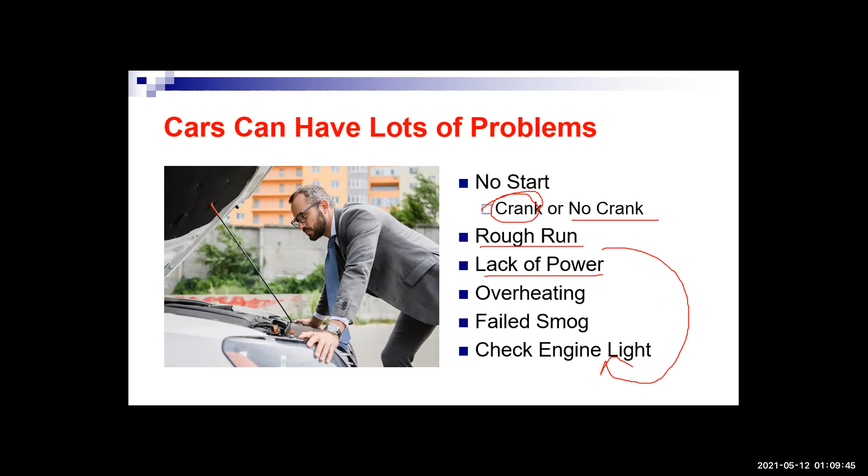You could have a car that runs rough or has a lack of power. Now that may or may not include a check engine light up on the dashboard. You could have a car that maybe overheats as we're heading into summertime here. We could have a car that, hey, this thing feels like it runs good, but I had to get a smog test done, and guess what? It failed smog. So there's all kinds of things when it relates to your car and getting that engine to run correctly that come into play here.

And it's a pretty vast area, and it's something that I've studied all of my adult life and then some, going on well over 20 years. So anyways, there's a lot of stuff to it.

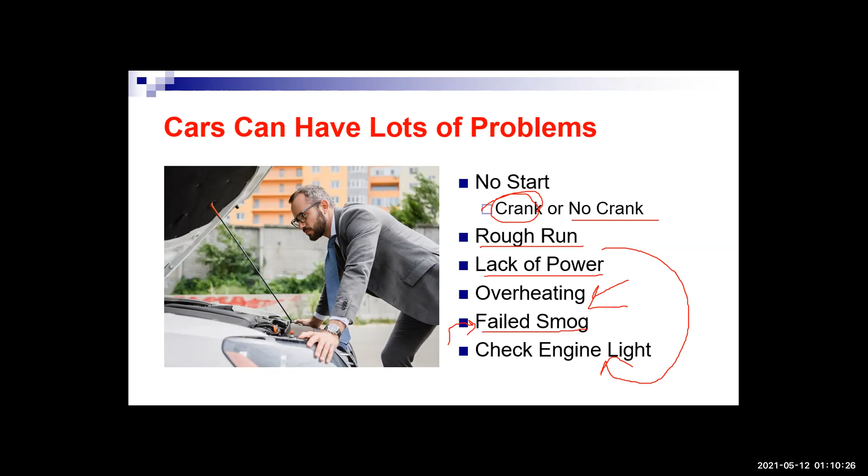As we talked about last week, the internal combustion engine on your car, the 4-stroke cycle and all that stuff in previous weeks, it's got to have spark, fuel, and compression, and everything has to happen in the proper order, the proper sequence, the proper timing in order to get this engine to run. So there's a lot of stuff going on there.

Now, I'm looking at, looks like we've had a few people join on the line, and that's awesome. I see Lonnie jumped in with us. It's good to have you here, Lonnie. And again, we have Rebecca and Tim and Jacob, Tyler. It's really good to have you guys here.

So we're going over some diagnostics. And again, we're basically merging our electrical and engine diagnostic presentations together to get you the most out of this thing.

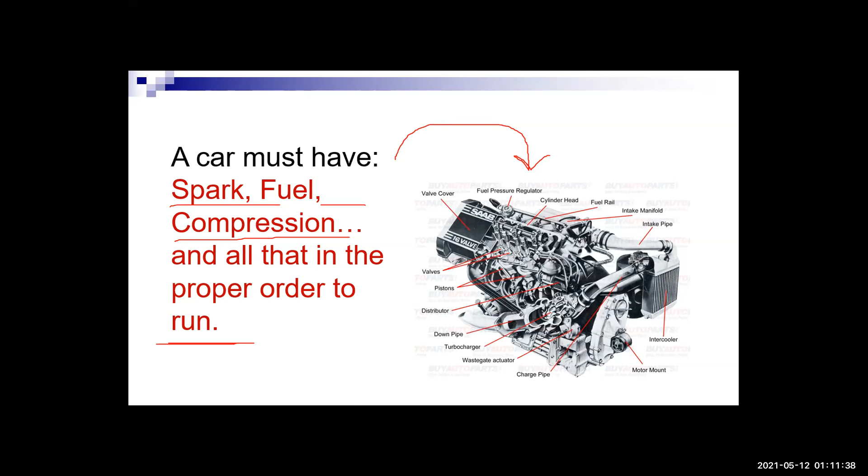So one of the things that I mentioned last week that's super important is to not forget to check the battery. And it might seem kind of silly almost in a way, but it's really, really important. In fact, what will happen is you'll think the battery's just fine, and maybe it's not, maybe it's just getting a little weak. If the battery voltage drops below 10 volts, and actually I've found it, if it drops below 10.5 volts, the computer may not be able to function properly and do its job.

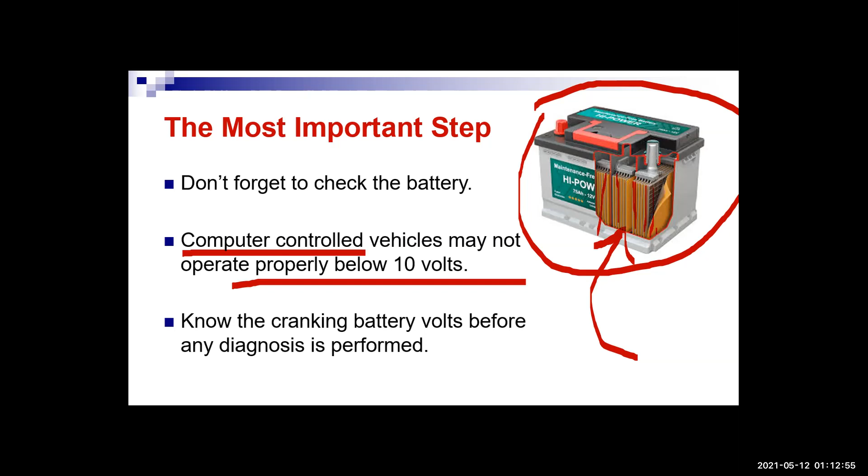So here's a picture of a car battery, and it's cut away so you can see on the inside there. And inside a car battery, guys, you have a mixture. There's liquid in here, and that liquid is a mixture of sulfuric acid and water. And then inside you can see that there's all these plates here, all these kind of paper separator looking things. Those are plates, and the paper separators separate out the positive plates from the negative plates. And then those plates are put together in groups, and they ultimately get connected to the positive post and the negative post of the battery.

So this battery, guys, you actually have a chemical reaction that occurs inside here, and it uses that to make electrical voltage. Well, these batteries typically have a lifespan.

So if I get my text tool up here, yeah, let's see if I can do that. Let's see, text tool. All right, if I get my text tool going, what I'm going to say is the lifespan is usually, let me do this, 3 to maybe 6 years car battery life. And if I just want to make sure you guys can see that. Oh, you can't. Hang on a second here.

Now let's make sure that you guys can see that. I don't know if you can see it or not, but 3 to 6 years, that's the life of our car battery, with most batteries lasting about 4 or 5 years.

So 4 years, 5 years. One of the things I look at when I have a car that maybe doesn't start is how old is this battery? If it's 4 or 5 years old, it's kind of suspect. Know the battery volts before any diagnosis is performed. You could have a car that doesn't start. I've even had a car fail smog because of a defective battery that was constantly draining the electrical system down.

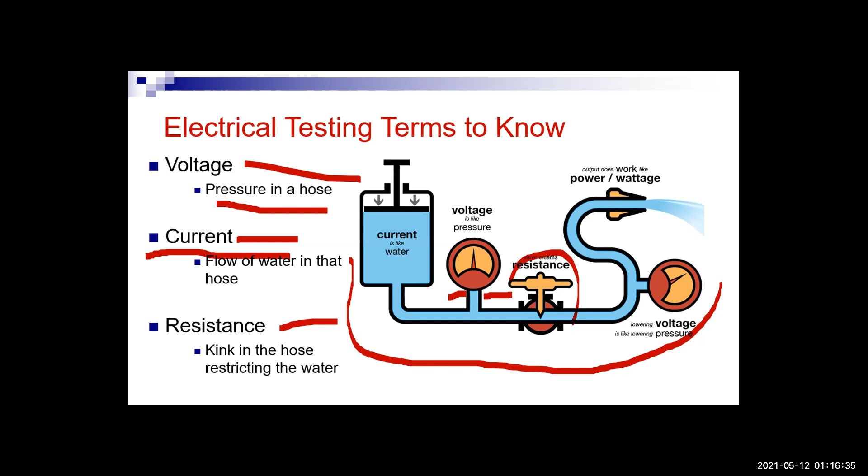So anyways, voltage is like your electrical pressure, it's your pressure in your water hose if you will. So if I have a water tower here, that voltage is my water pressure, okay, it's electrical pressure though. Current is like water flowing through the hose, and resistance would be a kink in that hose that would restrict the flow. So again, what are these terms really?

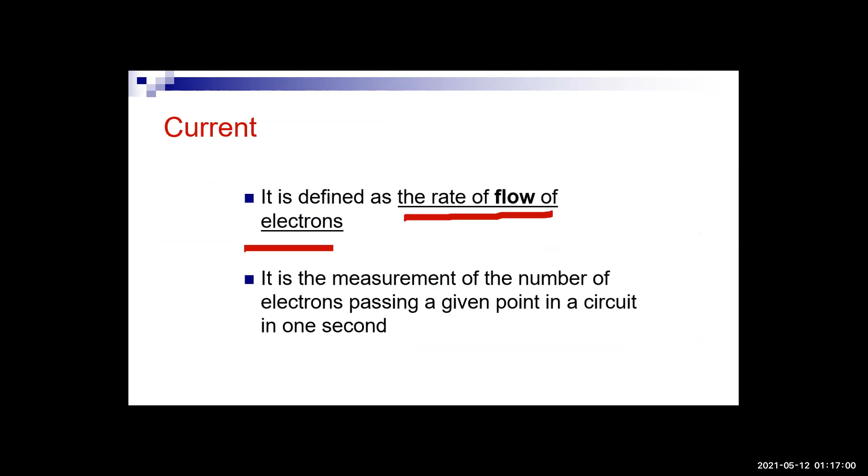Voltage is electrical pressure that causes the electrons to move in an electrical circuit. Current is the flow of the electrons through the wires, through our components, whether that's an electric motor or a light bulb. And then resistance is any opposition to that flow. So if there's any opposition to the current flowing through the hose, that's going to be resistance. I don't care what electrical circuit you have, any circuit that's operating is going to have some voltage, some current, some resistance, all playing out in that circuit.

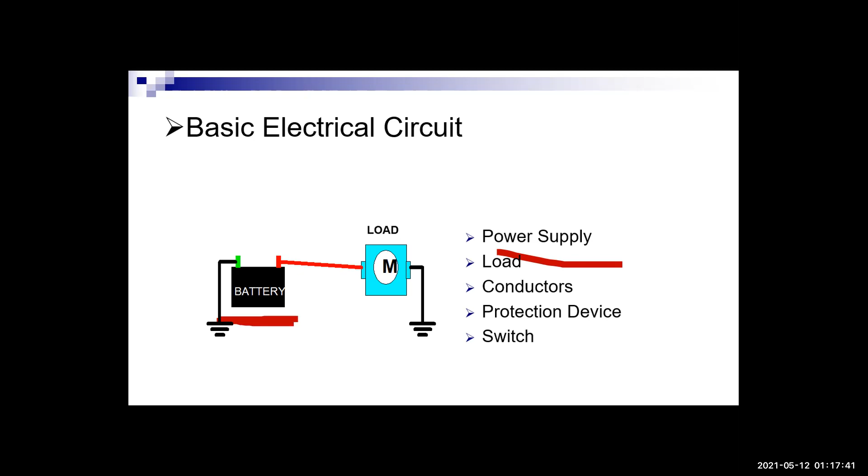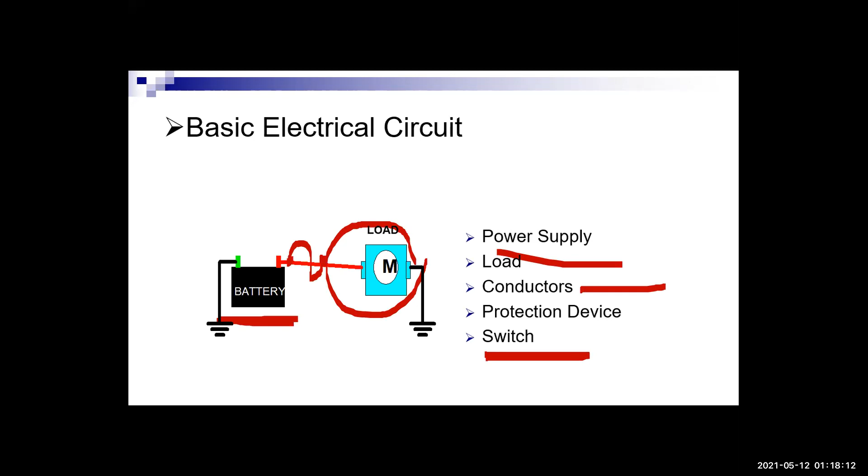Now, what are some of the things in a basic electrical circuit? Well, you're going to have a power supply, for us in our car that's our 12-volt automotive battery. You're going to have a load, that could be your starter motor, it could be a headlight, it could be the car's computer system or an electric fuel pump. Protection device - there's usually some type of fuse in that circuit to protect the wiring. I'm trying to draw in a fuse right there. Conductors, those are the wires themselves. And I usually have to have some type of control, some type of switch to function that circuit. So there's going to be some basic parts to build an electrical circuit that you need to have happen.

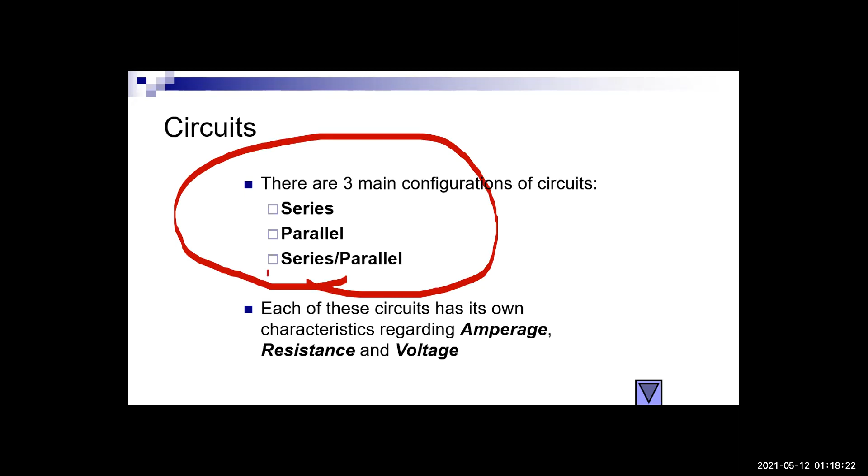On top of that, there's different ways that you can wire up these circuits. You can wire up in series, or you can wire up in parallel, or you can have a combination of the two. In the electrical class, we spend a lot of time diving into the different circuits and testing them. But to show you, I'm going to show you a picture of how it would look more on a regular car. Now keep in mind that each type of circuit has its own characteristics regarding how the amperage flows through the circuit, what's going on with the resistance, and how voltage drops happen throughout that circuit.

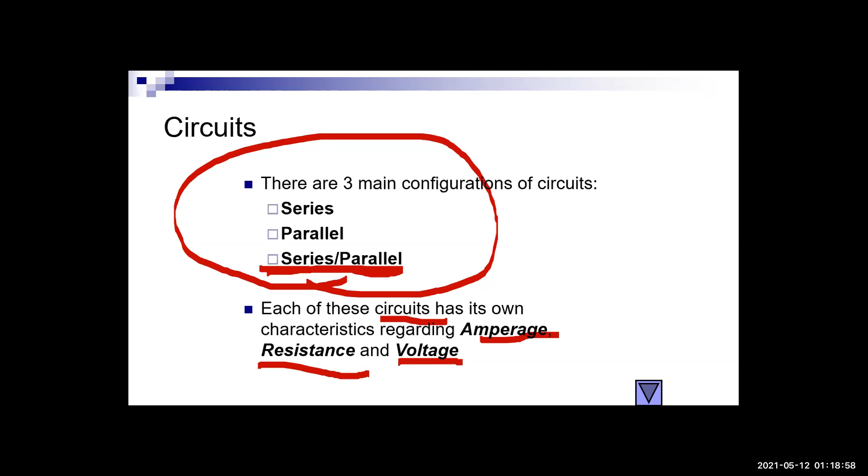The conductors or wires, good materials for conductors are things like copper, aluminum, steel. Well, the frame of our car is made out of steel, so that becomes a pretty good conductor. So instead of having to run wires all the way out to our component here and all the way back, what we can do is tap into that ground or that vehicle frame and use that as the negative connection back to the battery. That's how we do that.

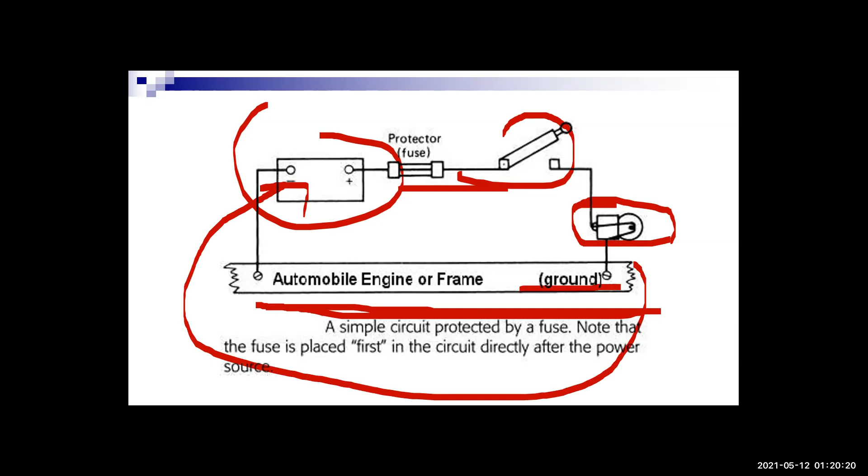So where it might look something like that on the car, on a wiring diagram, what would be done is it would be drawn like this, where this weird looking symbol with all these lines is the battery.

We saw kind of a cutaway of a battery. That was a series of plates, right? Positive plates and negative plates. Now, if you've ever lifted a battery, you know they're pretty heavy. That's because what's on those plates is lead. It's sponge lead on the negative plates and lead peroxide on the positive plates.

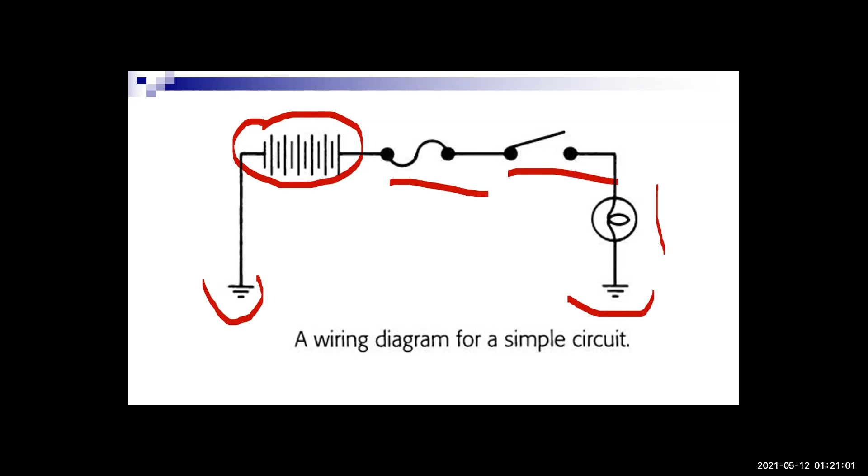So there's our battery, here's our fuse, there's our switch, and there's our light. And this is the schematic symbol for ground. So that's a good example of a series circuit, meaning that there's one path for current to flow. The problem with this series circuit is if anything opens up, then the whole circuit goes out.

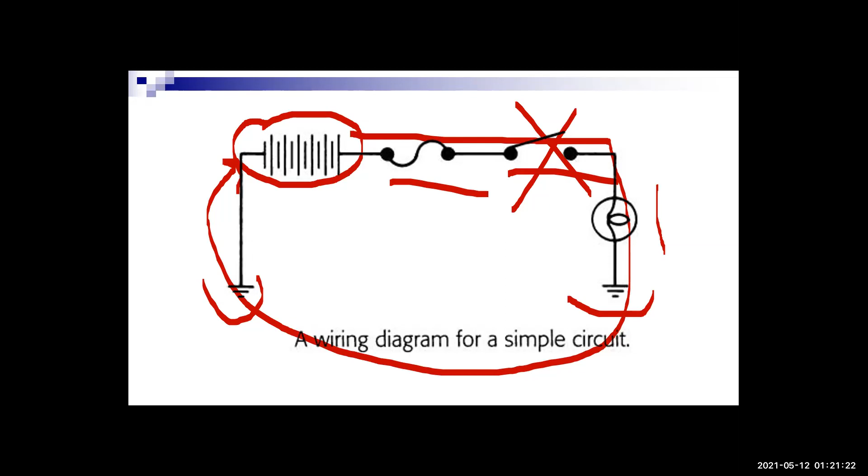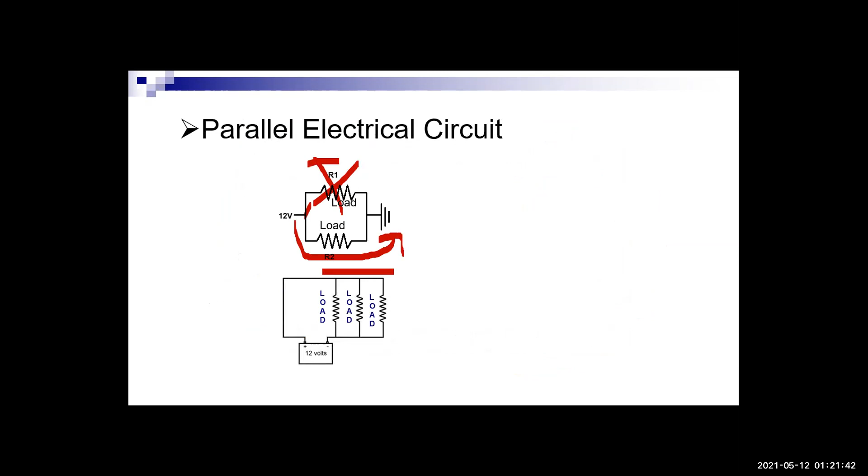Most of the circuits on your car are going to be a parallel circuit, or maybe a series parallel circuit, a combination of those two. So if this is a parallel circuit, instead of these being resistors, if these are two headlights, if one headlight burns out, guess what? The other headlight's going to keep going. And that's why we tend to run our automotive circuits in parallel, so that they have more than one path for current to flow.

And each device then receives its full source voltage, and each device has its own path to ground. Now, I need to put some terms up here. We talked about voltage, current, and resistance. I need to talk about what do we measure this stuff in. For instance, voltage, that's an easy one, it's measured in volts. Current, though, current is measured in amperes or amps.

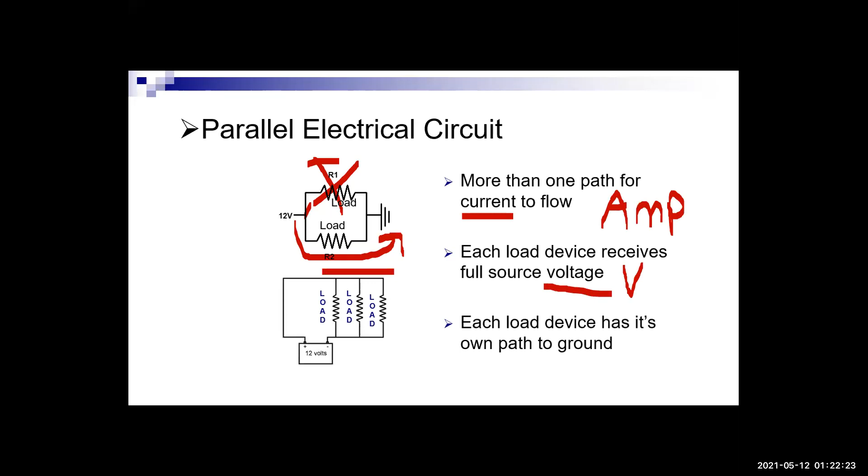So now what we're going to do is shift over and look at how this would look on our meter, and how we could do some tests with a basic multimeter. You could have any one. This is like a $40, $50 meter that you get from the local auto parts store. And in one of our classes, we feature this Snap-on meter that's like a $400 meter. So we went from a $40 meter to a $400 meter.

Here's a meter that you can get for just about $10 that will do a lot of electrical tests. And to get started, this is probably really the only thing you need. It can do a lot of the basics that we're going to be talking about tonight. So let's look at these meters.

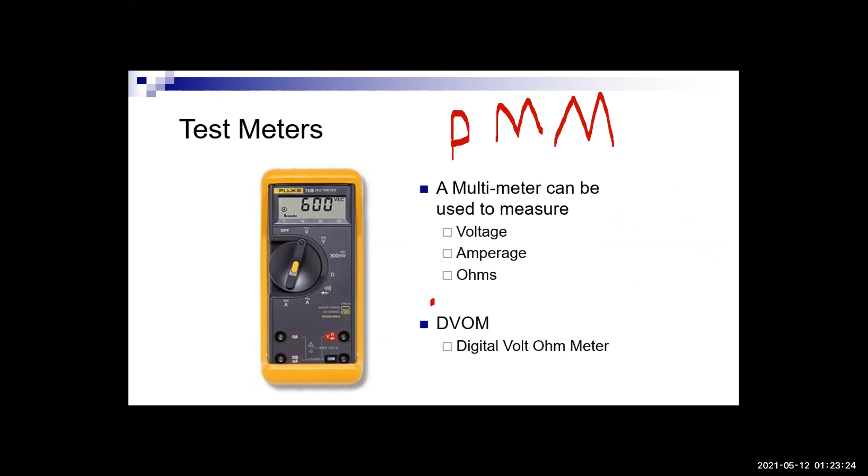We tend to call them a multimeter, or DMM, for digital multimeter. Sometimes if you're old school, you might call it a DVOM, for digital volt ohm meter. But because most all these meters, even this cheap one I have here, can measure amps, it's really more of a multimeter. So it can measure voltage, that's electrical pressure measured in volts. It can measure the current flow, which is measured in amps, or it can measure resistance, that's measured in ohms.

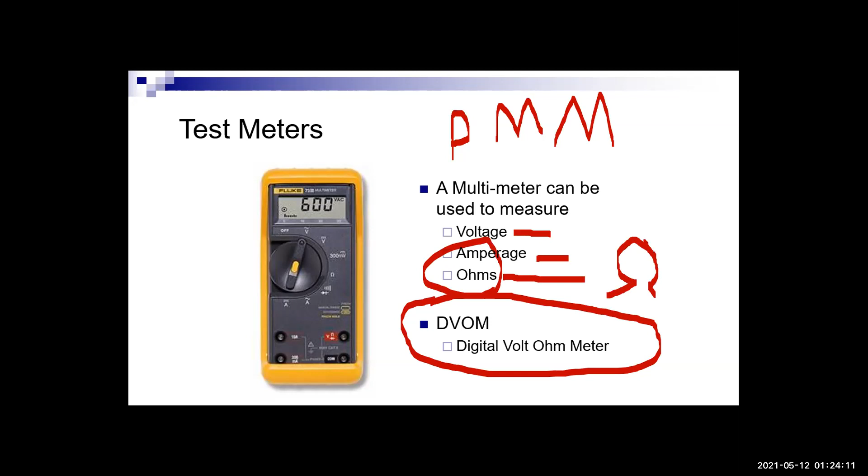Again, voltage, current, and resistance, those three properties. Voltage is measured in volts, current flow is measured in amps, and resistance is measured in ohms. On your meter you'll see a little Greek omega symbol that I'm trying to draw out right here. So what do those look like on your meter? What would you select on that dial right there?

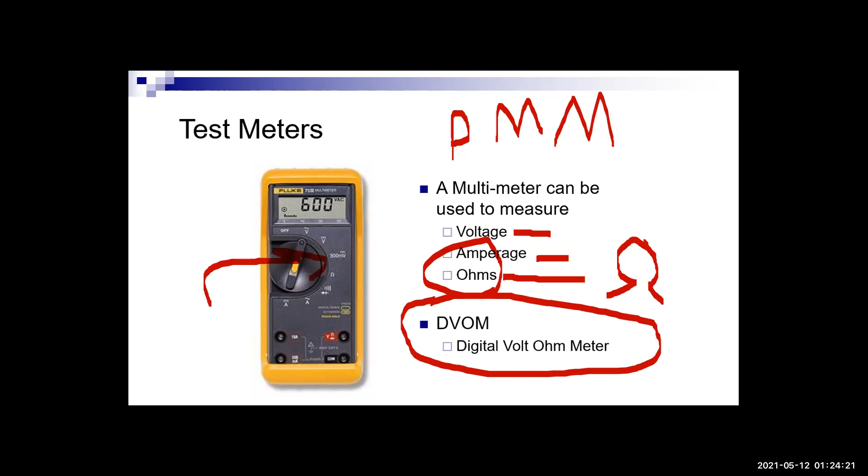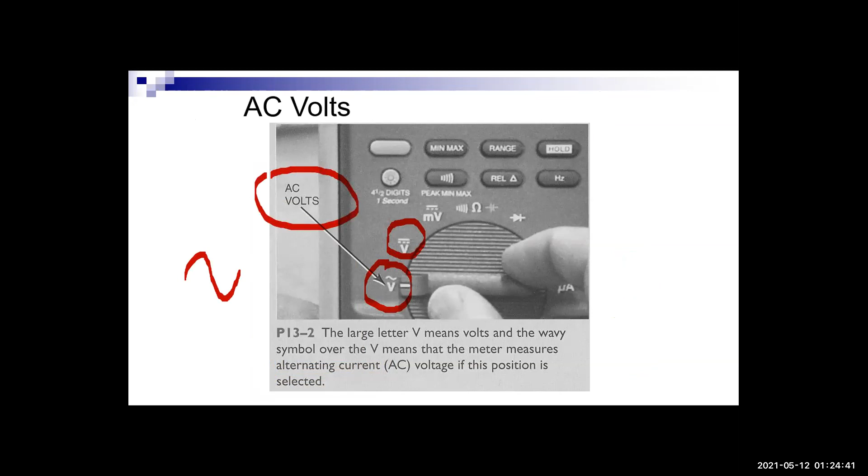Notice that there's a V right here on this meter face, and there's a V right there. Well, this V with the wavy line is for AC volts. And AC volts is typically what you'd have in your house.

Okay, it's alternating current. It switches back and forth, and if you put an oscilloscope on there, it would look like that. We don't use that feature too often when we're testing cars, but if you were testing electricity at your house, that's what you'd be on.

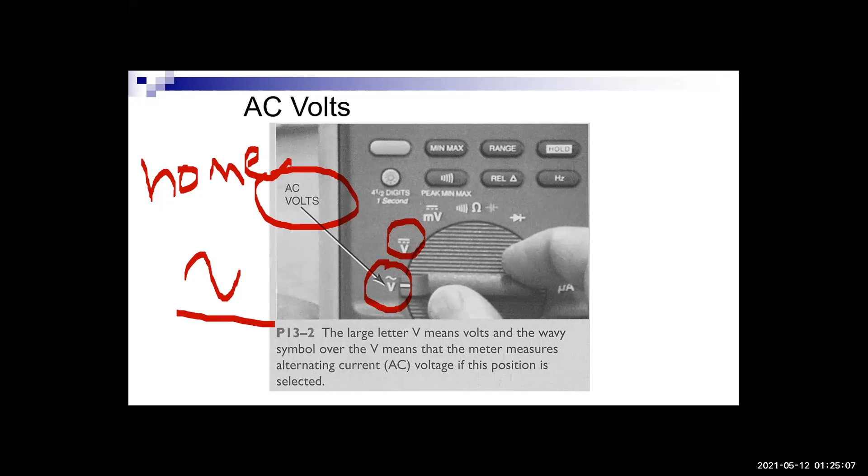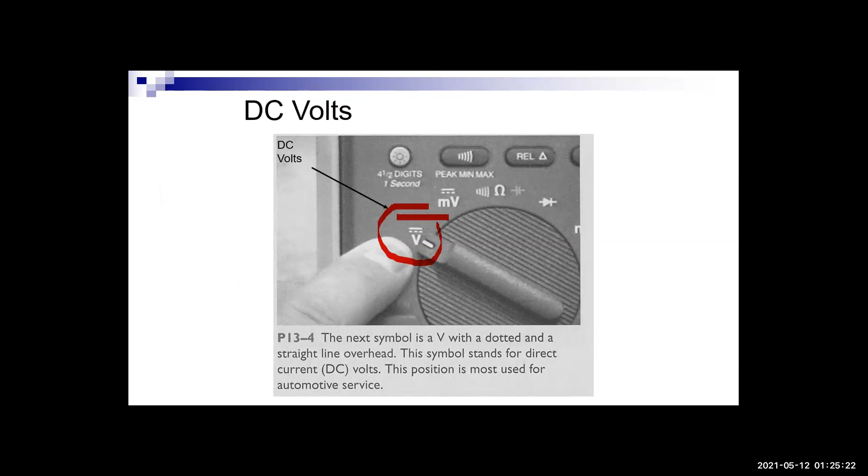Your car, because it uses a battery, measures volts DC, so they draw it with this straight line with a little dashed line underneath it, meaning the current, the amps, is going to flow from positive to negative. It's flowing in one direction. There's a couple different thoughts, whether it's conventional current flow or electron flow theory, but for our class, we're going to say it flows from positive to negative in one direction, and that's DC, or direct current. If you're measuring volts on your car, that's the most common measurement you're going to do.

So if I back up a couple of slides here, you can see it saves a lot of my scribbles here.

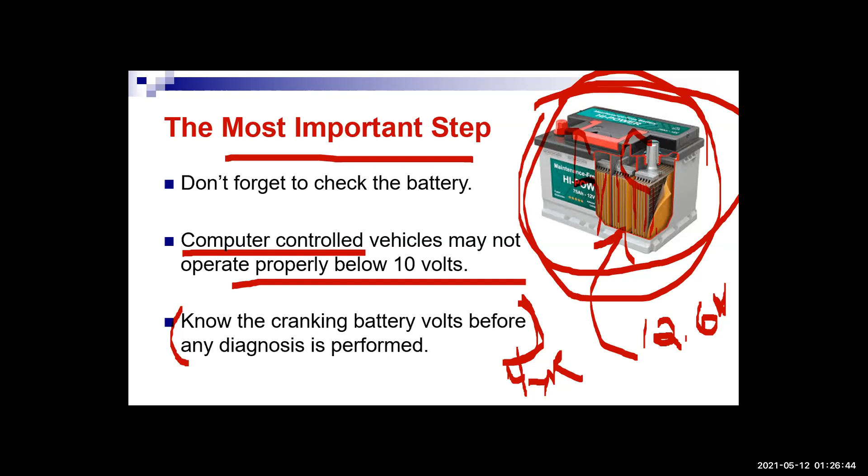When we talked about checking the battery, I would want to hook up to that battery, and I really want this battery to read not just 12, but 12.6 volts, because that's what a fully charged lead acid car battery should have. Believe it or not, if you walked up to that battery and tested it with your voltmeter set to volts DC, and it only measured 12 volts, that battery is really only at a 50% state of charge. So you really wanted to see 12.6 volts.

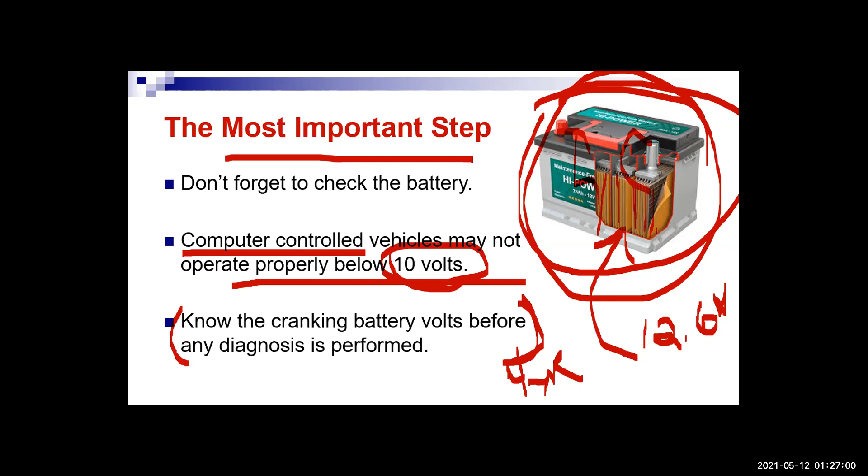And if you kept your meter hooked up as you were cranking over the engine, I would want the voltage to stay above 10 volts. Really, I like it to stay above 10.5 volts while I'm cranking over the engine.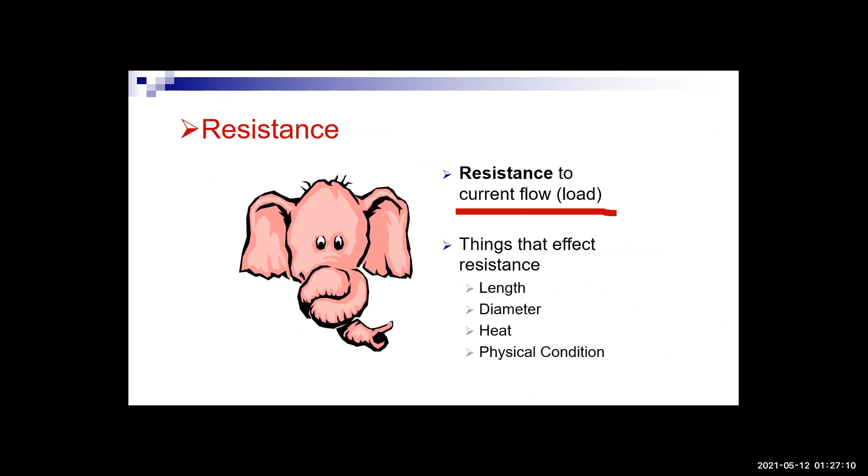So voltage, current, resistance. Remember, resistance is the one measured in ohms, and current flow is measured in amps. We talked about the circuits. We'll fast forward back to where we were.

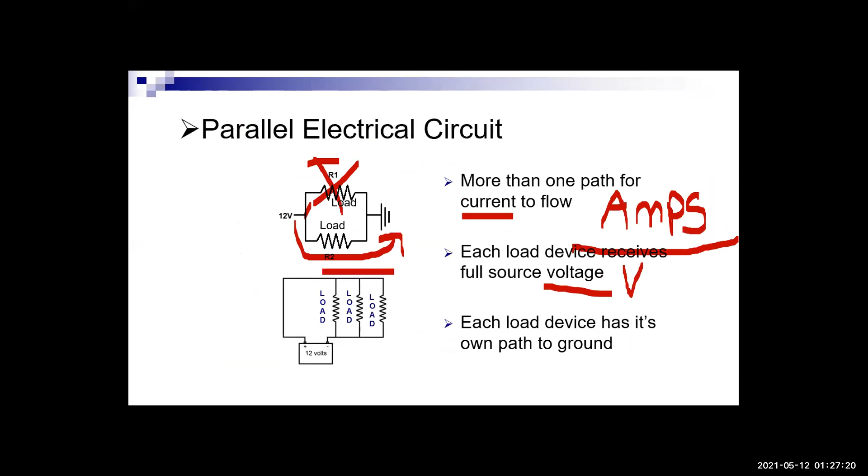So we want volts DC for testing our car, and it's the most common measurement we're going to do. Here's an example: if I had that basic series circuit with the light, before the light bulb, my voltmeter should read 12 volts. After the light bulb, if I hooked up my red lead or positive lead to the wiring going to the light, and the other lead to the chassis or to ground, it should read 0 volts at that point, or really close to it.

So again, voltage, what is it? It's like your electrical pressure, if you will. So it tells me, hey, before the light, I have pressure, and then I drop that pressure when I go through my load, when I go through that light. And that's really how it's supposed to work. I should have voltage before my component, and then after it should be relatively close to 0.

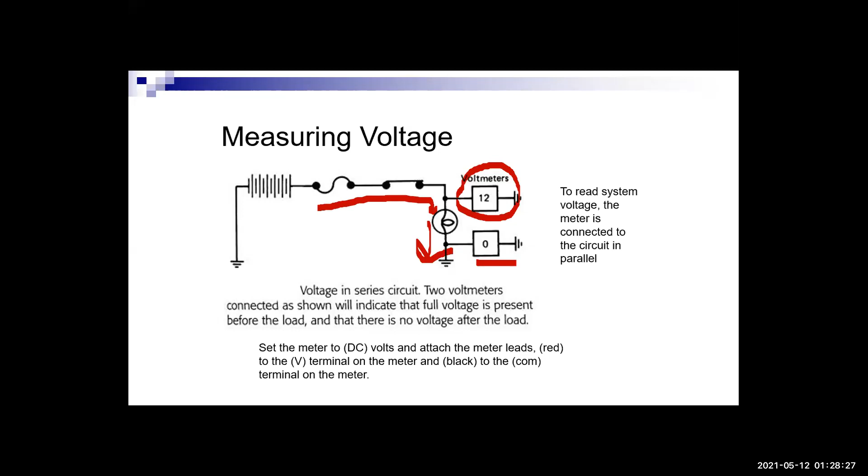So the higher the voltage, the more current flow you could have, right? Like if instead of a 12 volt battery, I had a 300 volt battery, well, I could flow more current, right? So that's why an electric vehicle doesn't just rely on a 12 volt battery. I mean, it still has a 12 volt battery to run the computer and stuff, but the actual traction battery that propels the car is going to have 300 volts or so, or more, to give you the pressure you need to drive that car down the road.

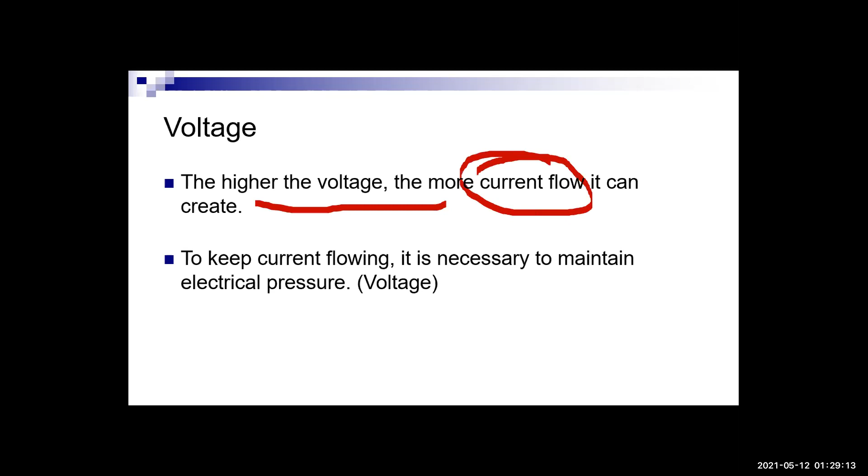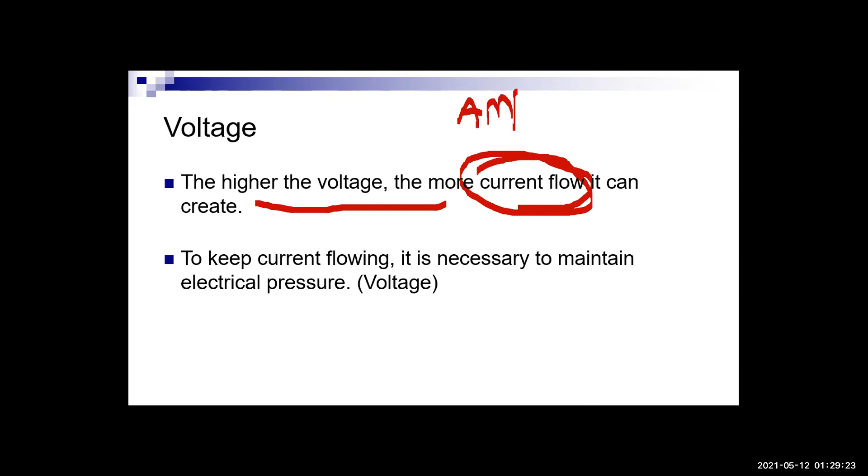Now it says the higher the voltage, the more current flow it can create. Here's the thing, it's really all about the current flow. It's the flow of the electrons, the flow of the current, which we measure in amps. That's what actually does the work. But if I don't have any voltage, if I don't have any pressure, I'm not going to get any flow, right? I'm not going to get any amps. So it's kind of a unique relationship there. I need the voltage to get the amps. It's really the amps flowing through something that makes it work. So I always think of the amps, the flow of electrons, through a little light bulb filament.

That's what makes that light bulb glow and produce light for you. Now, anytime you're flowing electricity through anything, whether it's a wire, a light bulb, an electric motor, or a fuel injector, remember that component is going to have some resistance. There's always some opposition to the flow.

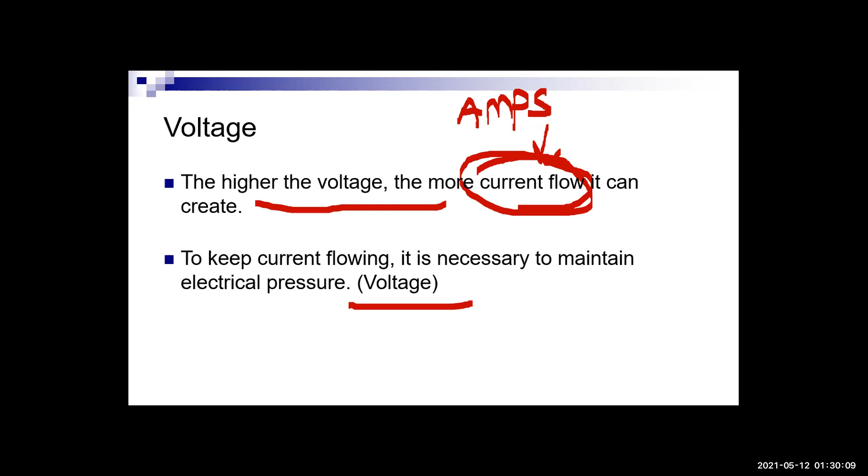How do we test for resistance using our meter? We go to that little Greek omega symbol. Every meter will have some type of resistance symbol. So if I put this one up on the screen right here, you can see that if I put my lead over there, I'm over in my resistance zone there.

So when I do that, I have to have my circuit turned off and my power supply disconnected, because when I'm testing for resistance, I'm sending power out one lead of my meter and I'm getting it back on the other lead. So if I touch these two leads together, this is where I can measure the resistance of my multimeter leads.

And this one says zero, which is pretty good. I'll go down to the finest scale. Let's see what it says. So 0.03, 0.05, something like that. All right.

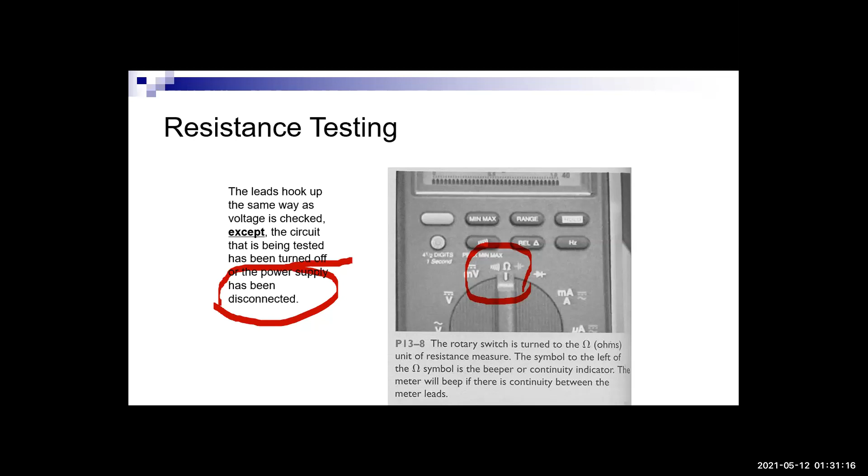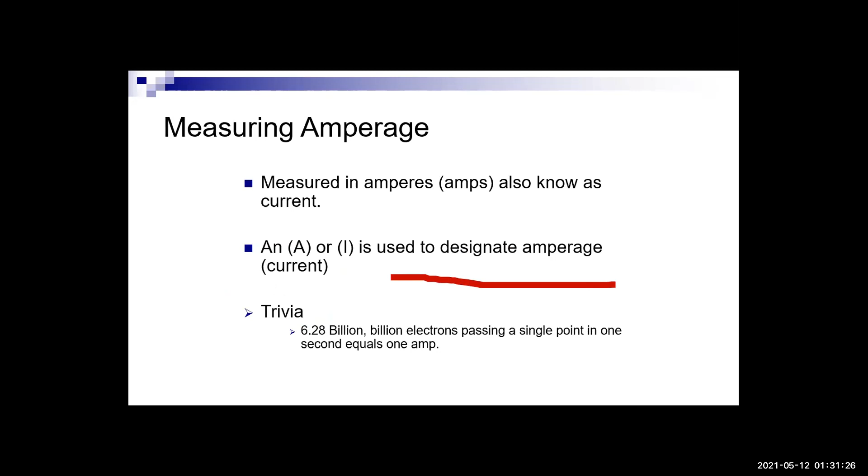Now remember, amperage is the flow of electrons. That's what it's really all about. That's what does the work in a circuit. And we would measure that going over here to these amps sections of our meter.

And it's pretty tricky. We not only have to go over to the amps section, but you've got to take the lead out and move it over to another spot on the meter to measure amps. So amps is probably one of the more difficult measurements to do. Your circuits and your meter are more vulnerable when you're measuring amps.

Fortunately for us, the most common thing you do really is measure volts. So I usually stick to that for my default, keeping the leads there. You notice that there's different ports that the leads go in. The black lead always stays in the COM port. So I'm going to take the leads out of one meter and put it in the other.

So the black lead goes in the COM port and he pretty much stays there. But the red lead, he can move depending upon what I want to do. Most of the time, 95% of the time, I'm measuring volts or ohms, and so he's going to go over here. Every once in a while, I want to measure amps and I have to move him to one of these other spots.

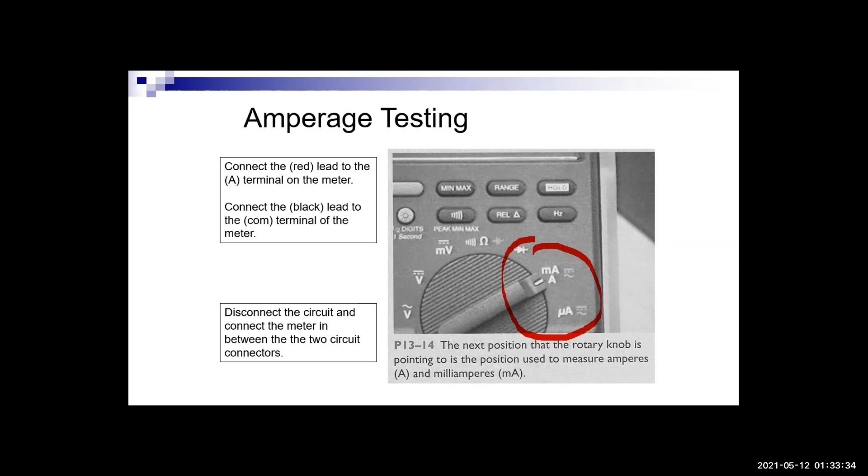So remember we were talking about diagnostics, and we kind of took this sidestep for electrical because one of the first slides says, hey, make sure you've got a good battery in the car. That battery should measure 12.6 volts. So it's a good thing to do: test the battery voltage. It should read 12.6 volts, and that's 100% state of charge, or SOC.

Now, if you have a car that's running weird, or it doesn't start, or it's got a check engine light on — this semester I've been teaching a scantool class, and I've been talking to those students a lot about building a diagnostic process, a step-by-step process to go through to help you figure out problems. A lot of times people think, hey, I'll talk to the computer on the car.

Well, what the scantool is could be a little interface like this one right here, could be an actual multi-thousand dollar tool, but it basically allows you to talk to the computer on the car. It's a tool that allows you to scan or talk to the computers on the car.

Well, guess what? That scan tool doesn't replace your multimeter. It doesn't replace a lab scope for that matter, or any other dozens of different diagnostic tools like a compression tester or anything else. But it does allow you to talk to the computers, and from that, you can do a lot of diagnostics. Why? Because built into our cars these days, over the last 20, 30 years, as we put computers and stuff on our cars, we've also put on them an onboard diagnostic system.

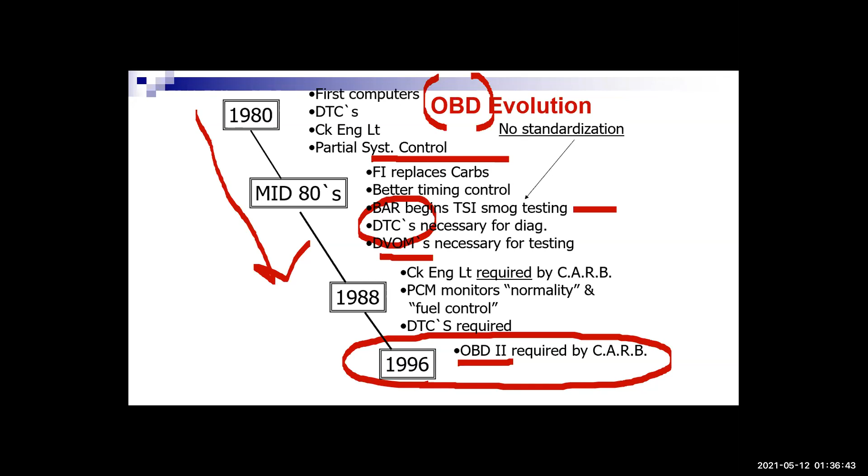Now, one other note on talking to the computer. When I talk to the computer with my scanner, whether it's a little interface or like this nice Snap-on scanner right here, we call that backdoor information. Why? Because it's processed information from the computer. And that means that sometimes the computer misreads stuff. It's like you're seeing whatever the computer thinks it's seeing, and then it decides to tell you about it.

It's like getting a story from a friend of a friend—over time, the story changes. Because we've used our scan tool to talk to the computer or powertrain control module, and it got its information from the input sensors, stuff can change in there. So I always look at scan tool data with a little bit of skepticism, because sometimes it can throw you astray. But if you understand how to leverage it, it can really be useful.

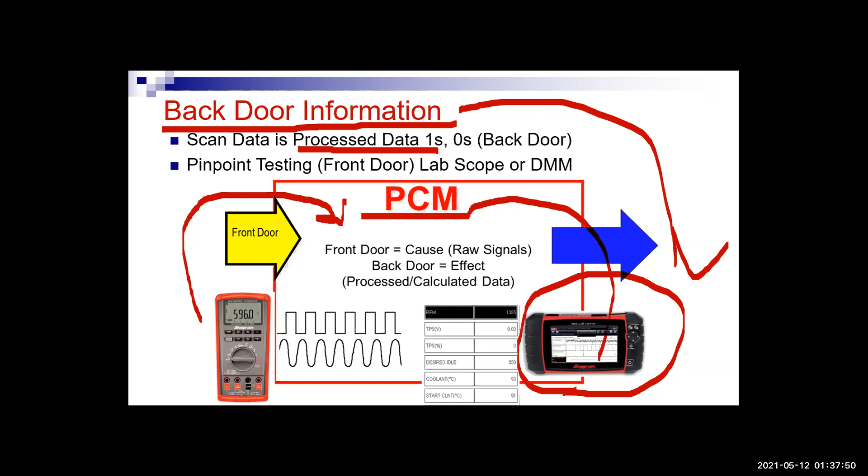Now, that being said, there's all kinds of different levels of scan tools. Like I was talking about, this cheap interface—here's a whole bunch of these inexpensive interfaces. I really like this one right here, the Vgate iCar one. It has pretty good connectivity to both Android phones and iPhones.

But there's a reason why the folks at the dealer have scan tools that cost $8,000. They can do a lot more features and really tap into those computers. Those scan tools will be manufacturer specific. They're going to have all kinds of things that they can do, but they also cost several hundred, if not thousands, of dollars each year just to keep the scan tool working.

With these little generic scan tools, we're basically going to be focused on things that ultimately affect the emissions of the vehicle. So you can't get all the information—you may not be able to get things like wheel speed sensors and your airbags, but you should be able to get the stuff that relates to your engine and would cause a check engine light or cause it to fail smog or run weird.

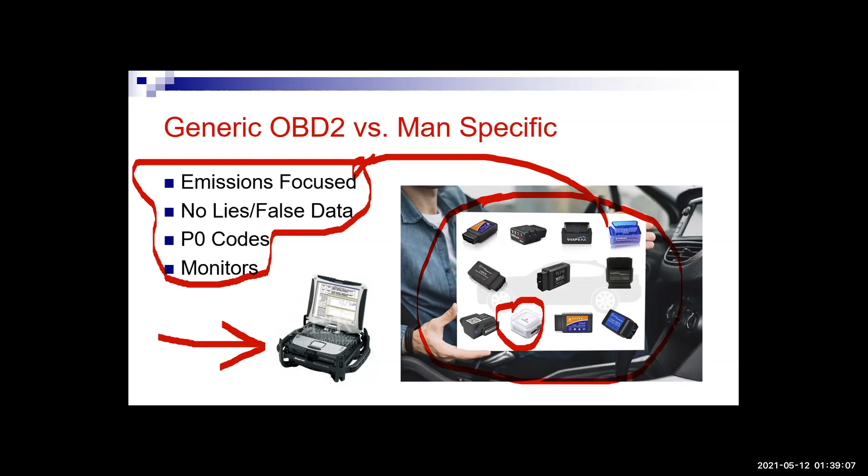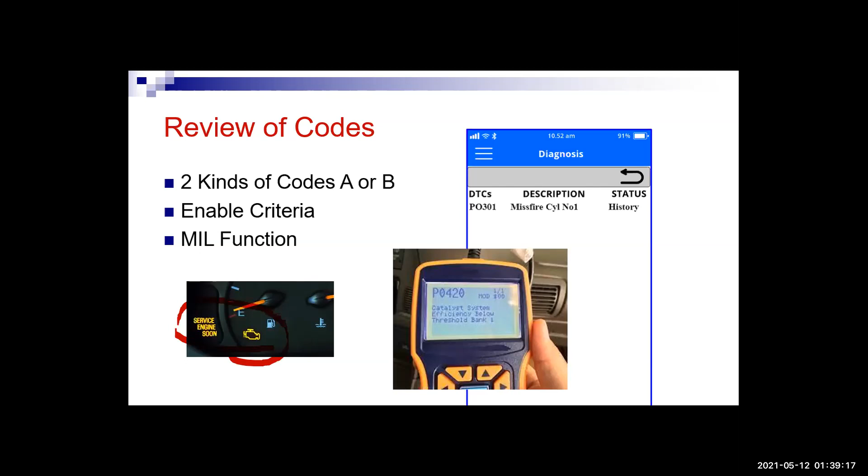So if you have a car that's running poorly, or it doesn't start, or it has the check engine light on—and that light's going to look something like this, might have a picture of the engine, it might say service engine soon, or it might say both—we call this the malfunction indicator lamp. So if that light is on, guess what? That computer has set some codes.

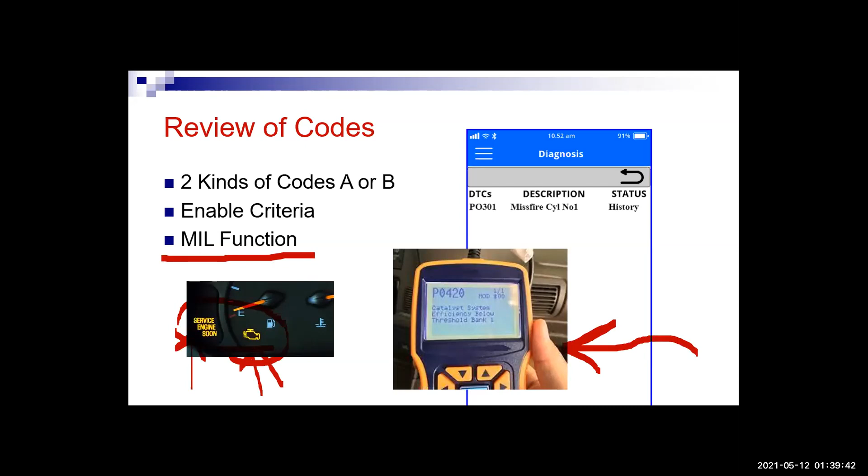One of the things that would be smart for you to do is go in there and talk to the computer with your scanner. So here's a handheld scanner, similar to what you could probably buy at your local auto parts store, and it's pulling a code. You want to pull that code, whatever it is, and figure out what's going on there.

Just because it sets a code doesn't mean that's definitely what's wrong with the car. Here's a good example: I have a P0301 misfire code on cylinder 1. Does it tell me why it's misfiring? No. It could be a defective spark plug, it could be an engine with low compression on cylinder 1, it could be dozens of different things, like a clogged fuel injector. It doesn't tell me exactly what the problem is. It tells me that it set a code, meaning the computer looked at it and something isn't right related to this. It's up to us, with our multimeters and our automotive smarts, to figure out why that code is being set.

When I see the check engine light on—this malfunction indicator lamp or service engine soon, whatever you want to call it—I think, okay, the computer's upset about something. I'm going to get my scanner and see what it's upset about. That's what I'm doing when I pull the code.

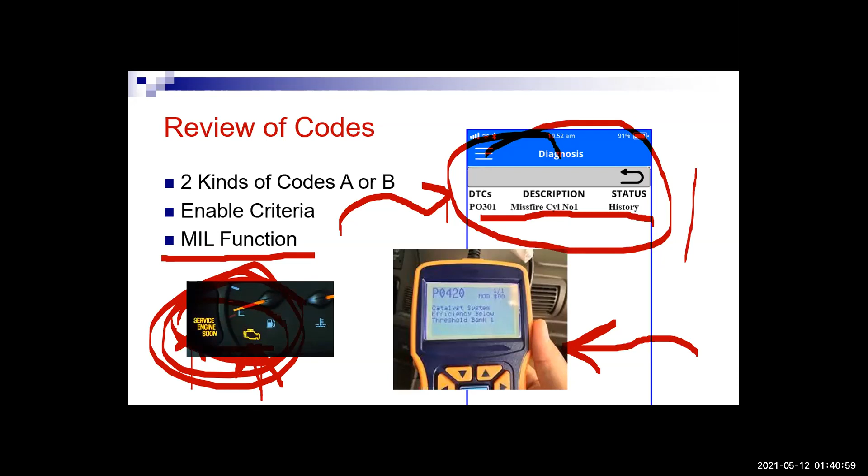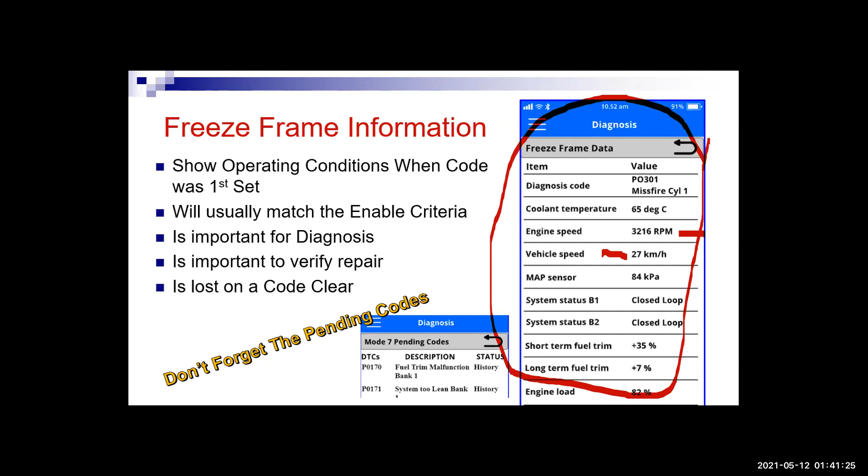One of the things cars from 1996 and newer, our OBD2 cars, have is what they call a freeze frame. It can tell you what happened, how the car was being driven when the code was set, and that's a really strong thing to check. So this car was going 27 kilometers an hour at 3,000 RPM. If I scrolled down, I could see how fast it was going down the road, all that type of stuff. Not only does it set codes, sometimes there are codes that aren't full-fledged codes—we call those pending codes—and you can check those as well.

There's all kinds of data you can get from the computer. This data might look complicated, and that's because it is—we have whole classes, semesters long, that teach you about all the data PIDs, what they mean, and how to read them. But these are all different parameters, and most of them relate to sensors on the engine. So this one right here says engine RPM—that's going to largely come off your crankshaft position sensor, or CKP sensor. In fact, we talk about prioritizing these data PIDs and just selecting the most important stuff. The scanner can definitely give you a direction to go.

In my scanner class, we've spent quite a bit of time with these little cell phone based interfaces, and the ones we use work with the ELM 327 protocol. That's what we have in the AT100 class as well—we talk about the ELM 327 communication protocol between the scanner and your cell phone. It basically uses your cell phone, and you can get different apps. The one we've been using is called Car Scanner Pro, available for both Android phones like mine or iPhones, and it works pretty good. This is what it looks like.

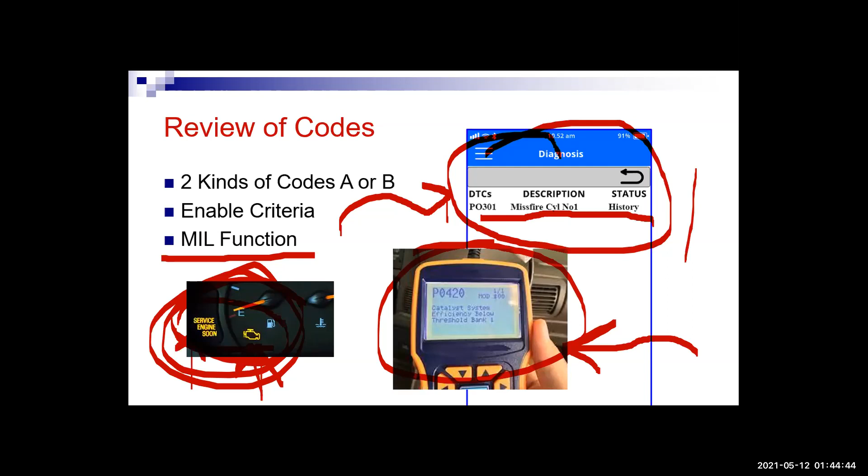If your check engine light's on, you're going to figure out why the computer—not necessarily what's wrong with the car, but what the computer is upset about. Whether it's a misfire on cylinder one, whether it's fuel trim issues, whether it's a catalytic converter. So anyways, the scanner is one more tool in your diagnostic toolbox to help you figure out what direction to go.

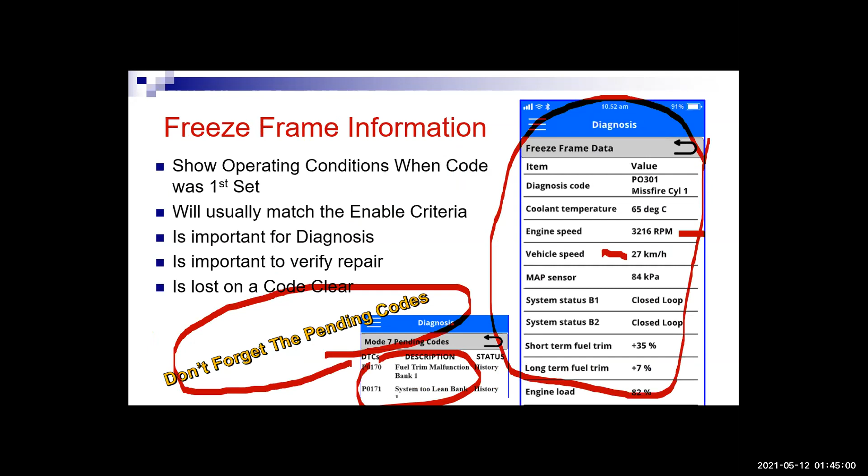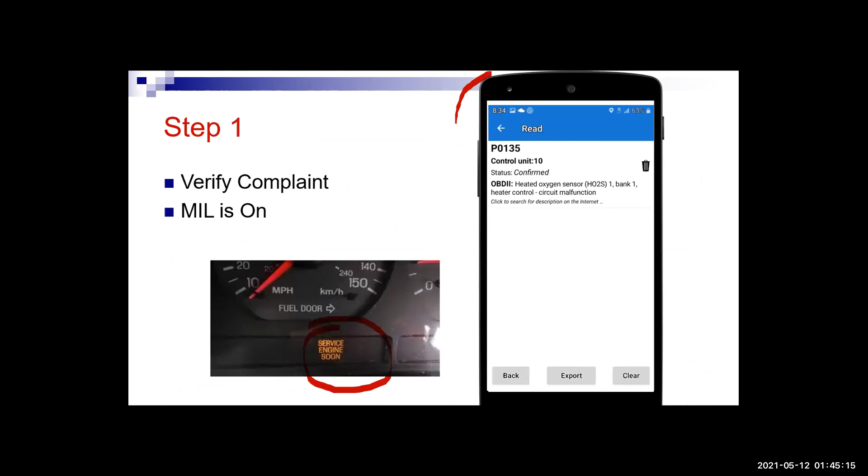There's a lot of stuff with that. So if I had any drivability problem and this light was on, one of the tools I would grab right away - I would still check to make sure I had a fully charged battery and all that stuff, but I'd grab one of these scanners and check to see if I had any codes.

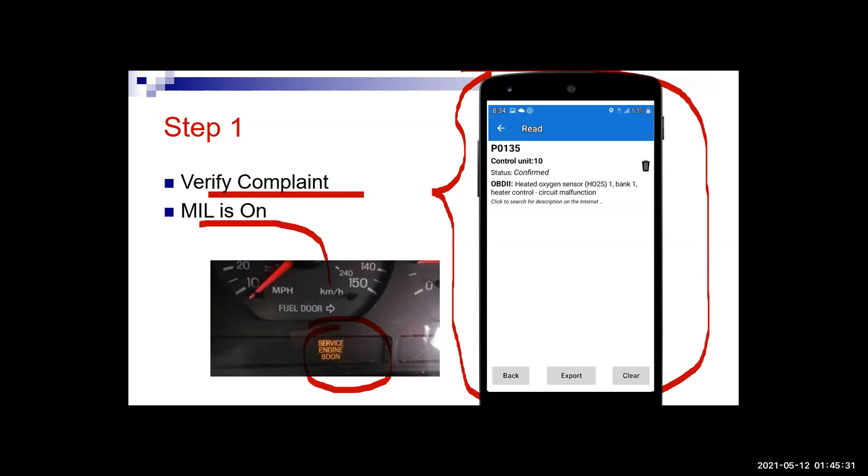So step one, verify the complaint. Maybe I test drive the car, it's running poorly, and I verify the check engine light's on, the MIL is on. Let's pull the codes. Here we're pulling codes and checking for pending codes by clicking this icon. In this case, that's the code I got off a vehicle I was recently working on for an O2 sensor heater. Does that mean the O2 sensor is definitely defective?

No, it just means the computer's upset about it. That could be related to a blown fuse on the car. It could be related to a bad sensor. It could be any number of things. Even an exhaust leak could cause that code to be set.

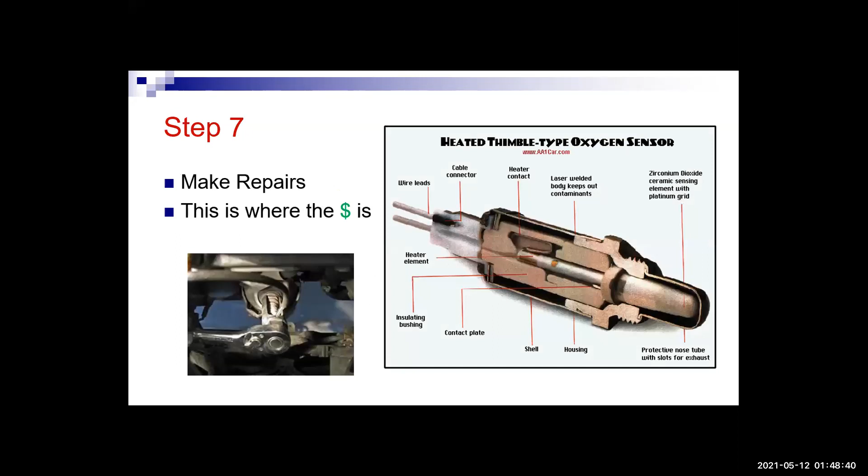So does a scanner replace having a multimeter and knowing about electricity? No, it doesn't. It doesn't replace a fuel pressure gauge or anything else. It's just one more tool in your diagnostic toolbox that you need working on modern cars these days - and when I say modern cars, I mean cars within the last 30 years or so. So that kind of shows you some of the stuff that tool can do.

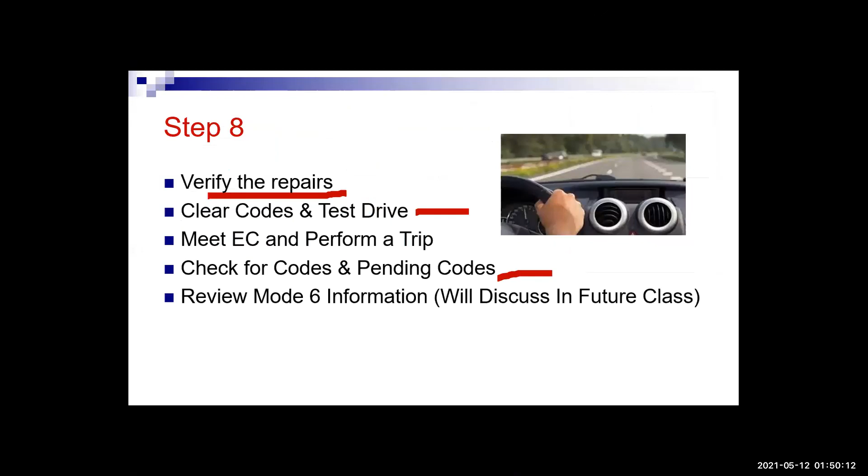So our last two things here are electrical basics and basic onboard diagnostics. And I need to - let's see here - I'll go to this electrical basics assignment.

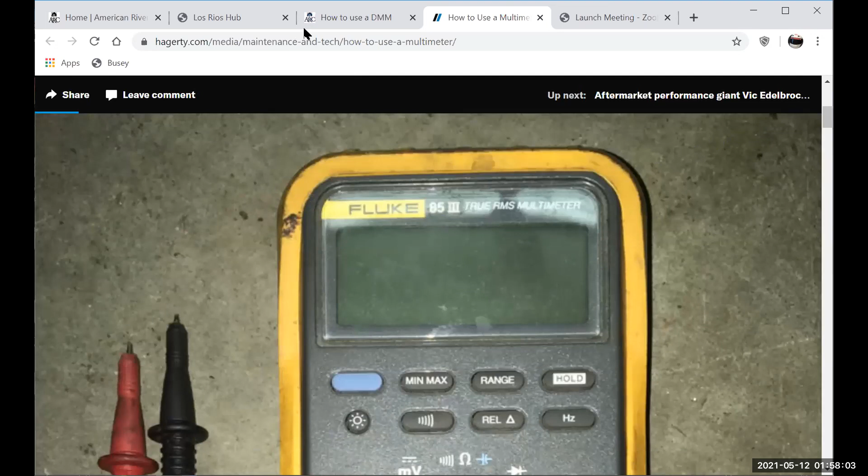And lastly, getting back to what are we going to do next week - we're just going to kind of finish everything up. We'll look at the final exam, which for some reason it should be in this module but I don't see it. We'll look at the final exam and finish things out. I did want to...

So no OBD2 scanner on this one. Okay, so that's what we'll be getting into next week, so I will have some good information for you. As far as...

Tech tips tonight, if you have a 1996 or newer vehicle, it's worth getting one of these. Put this on your birthday list, your Christmas wish list, something. It's worth getting yourself a scantool interface because tapping into that scantool is really important.

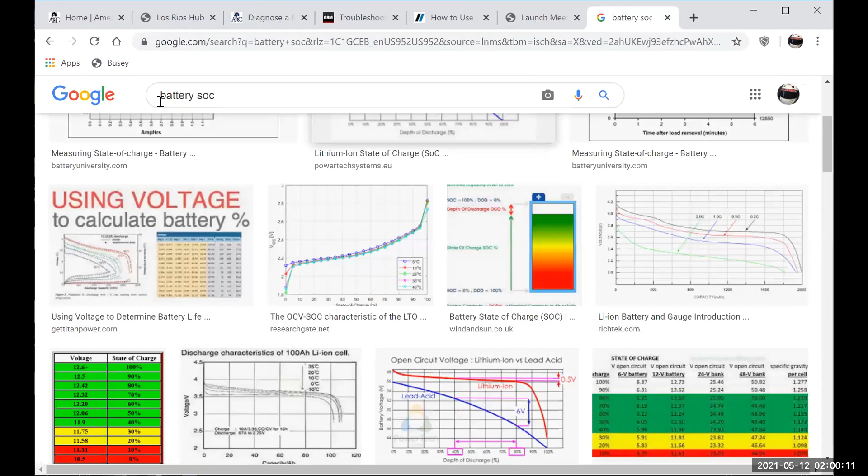And then my second tip for you guys is get yourself a multimeter and always look at the voltage of the battery. A fully charged battery should have 12.6 volts. In fact, I'm going to type in battery SOC for state of charge - and I guess I better be a little bit more specific - car battery, and it's made of lead and it has acid in it. So, lead acid car battery state of charge. And let's look at a good graph for that.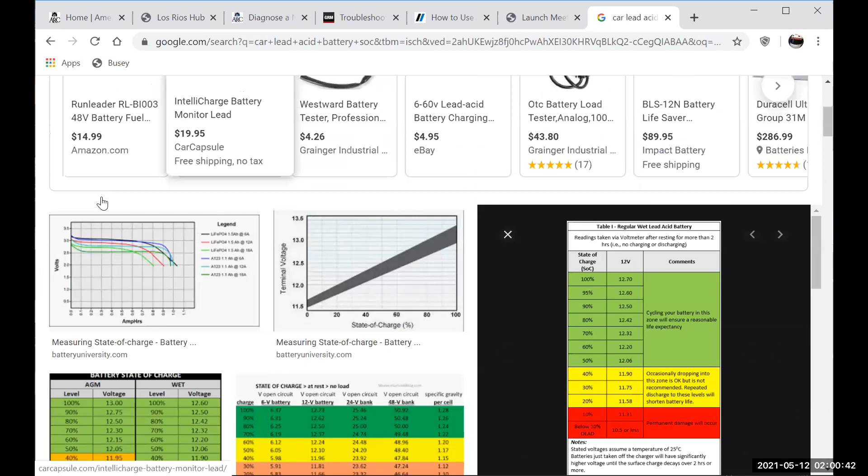And that's a little hard to read - not that one. All right, 13 volts, that's a little high. All these ones are a little bit off. Here we go, this is a pretty good one. That's what happens when you're just searching around on the internet. So 12.6 volts is considered to be a fully charged battery. What you can see is that when it drops down just a little bit, 12.5, now it's only at 90%. 12.45, now it's down at 75%. Look at that - if I'm at 12 volts, my battery is actually really dead. It's not a linear scale - you would think 6 volts would be 50% charged of a 12 volt battery, but that's not the case.

Okay, so one of your other tech tips for tonight is if you have a car, if it doesn't start, or even if it's just running weird, it's always worth your time to measure that battery voltage. With the car off, it should be reading 12.6 volts or higher. If it's not, that indicates other problems. Okay, so those are your two tips for tonight.